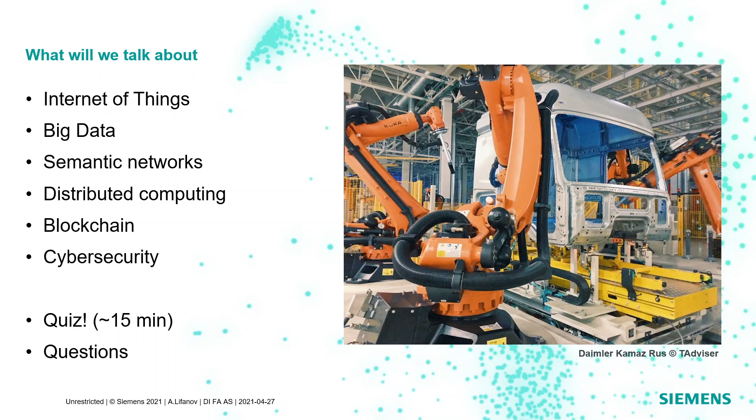Let's start. What is happening with modern industry today? We at Siemens are not directly connected to the so-called B2C, business to customer market, which we know personally, but the B2B market, business to business, it is also following the same things: sanitary shops, stores, manufacturing, etc.

You all know what you want to get if you want to purchase something. First, you want to get the thing as fast as possible. You do not want to wait for the manufacturer, even if the thing is customized in some way. For example, one person wants to buy a purple car, another wants to buy a black car, but you want to get it as fast as possible. So customization of manufacturing is one of the really modern and painful questions.

Another thing you may also notice is that innovations are coming faster and faster, and all of them need to be implemented in real manufacturing as fast as possible, because it is a real advantage for each manufacturer. If you implement a new thing in ordinary production, you can sell it, you can get more money, you can go further. So the company that is making manufacturing more modern is gaining more money.

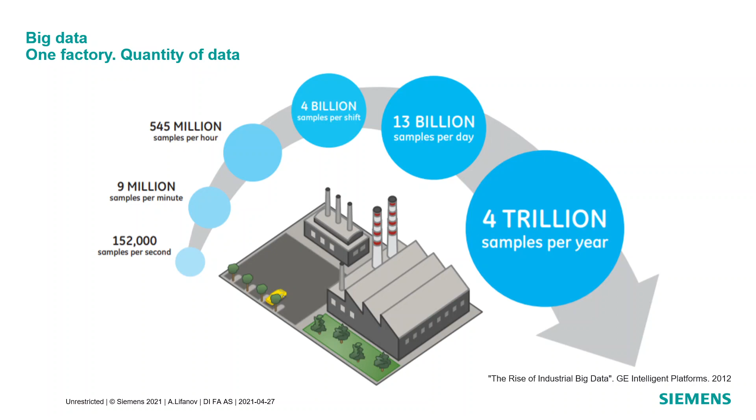It is a huge amount of data which needs to be processed, to be evaluated, to be stored somewhere, to be transported, and this whole thing produces an ocean, a full ocean of data. So during the rest of my lecture, I will use this metaphor with all other things.

The reasons are quite various. Some data cannot be transported from the measurement point to the place where it is needed. Some data needs to be pre-processed. Some data is quite complex to be extracted, and it needs some computational power. But the price of data that is not processed can be quite high.

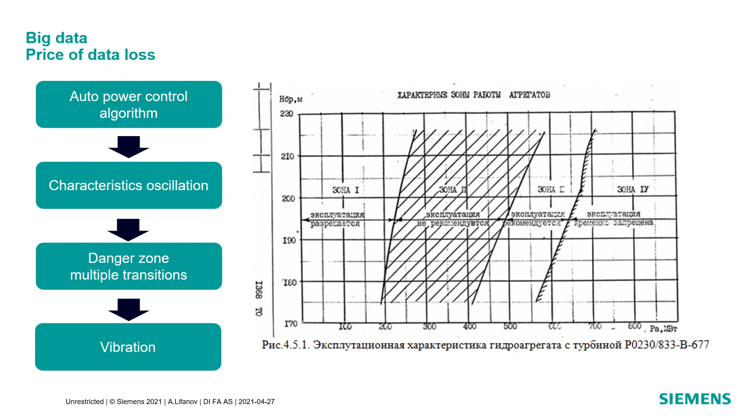But look, vibration is not an unknown thing to our times, to the mechanics, to the designers. But anyhow, this vibration was rising, and it led to destruction of the fixture which was holding the top cover of the generator.

You can imagine that a hydropower plant generator is a kind of wheel laying on its side, with a vertical axis. The lower bearing is deep inside the concrete construction, and the top bearing of this wheel, which holds the axis, is installed in the cover.

This cover is fixed by big bolts which hold all the construction together, but due to vibration it was destroyed.

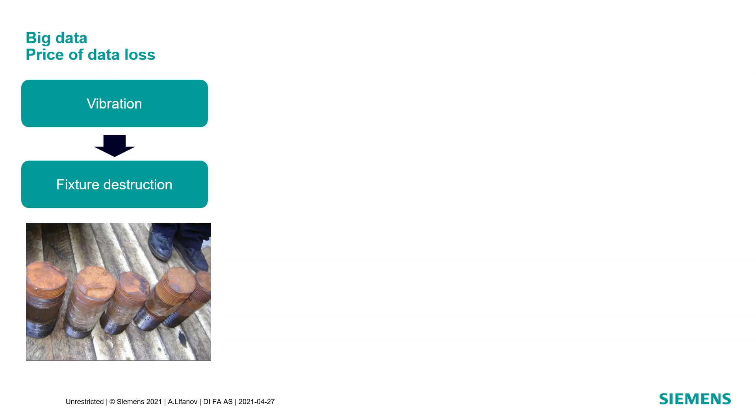The vibration is not a new thing, and it can be measured. There was some data extracted from the remains of the control system. You can see that the day of disaster was 17th of August, and even 2 months before, the average value of vibration of this generator passed over the alarm zone, and the maximum vibration passed even earlier, in May.

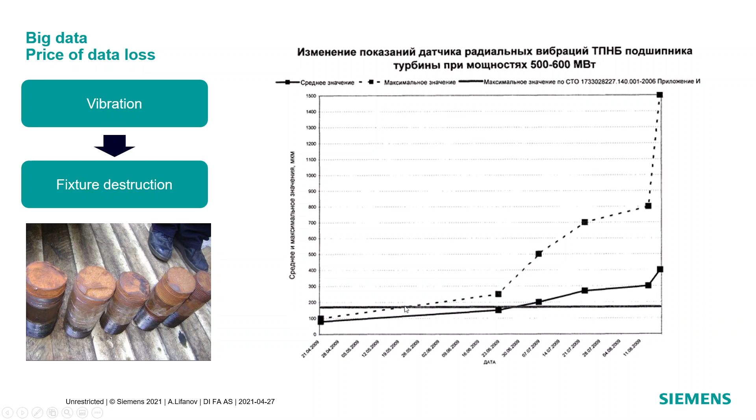What was happening? Why wasn't it stopped? Here is a citation from investigation documents. They are public, you can read it yourself.

But here is a key point: the vibration control system was not connected to the control system of the station, and it was not properly checked by the eyes, because every day it was showing normal digits. So station personnel didn't pay any attention to the numbers on the screen.

So when the vibrations started to increase, nobody stopped the generation of power for this generator. It could have been done within less than 1 hour, and this disaster could have been prevented, but that didn't happen.

So you can see that the data that was measured is not equal to information which can be used for control, for making decisions. Because data without some knowledge, some context, some meaning behind it, is useless for control, for all the processing.

How can we get information from the data? We need to process it. One more kind of question.

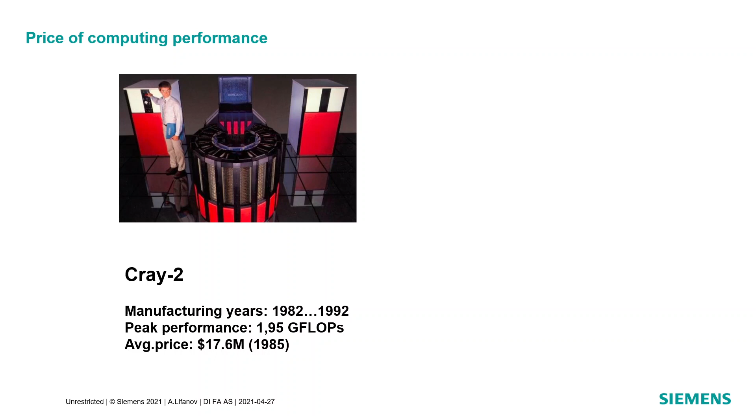Try to guess what is the thing which has the same calculation performance that we can now get in our pocket, in our bag, at our home. Any guess? Smartphone, maybe - quite close. It is an iPad, not even a modern iPad.

So you can imagine that calculation performance has risen a lot, and it is much more compact. It can fit in your small bag. And it can make the calculations at the same performance.

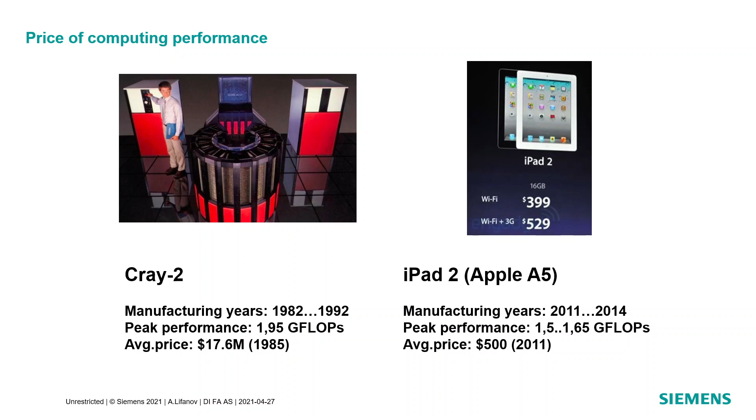So what can we do? For example, we have a milling machine, a steel mill, which has its own control system, but we need to diagnose it to decide if it's performing okay, or something is happening with it, maybe some degradation of characteristics. So we need to make some calculation.

So there is a known concept called cloud computing, when somewhere at some place in a server room there is a big PC which is processing the data. You are getting local measurements, you are sending them out, it is processed at some other place, and then it is shown whether it is okay or not okay.

But when you are dealing with some rotating equipment, the faster you are measuring, the better, because you can get more fine details from the characteristics of the equipment.

Because calculation power became more compact, there was offered one more concept called edge computing. It is called edge because the calculation is moved from the center of the network, from the core, to the edge of the network, and things have changed a little bit.

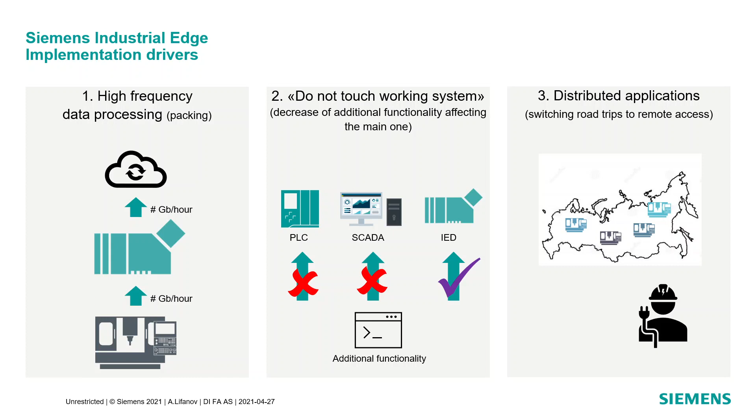For example, processing vibration or measuring energy consumption or something like that. But you can imagine that while the functionality is the same, the equipment on the lower level is quite different. What to do?

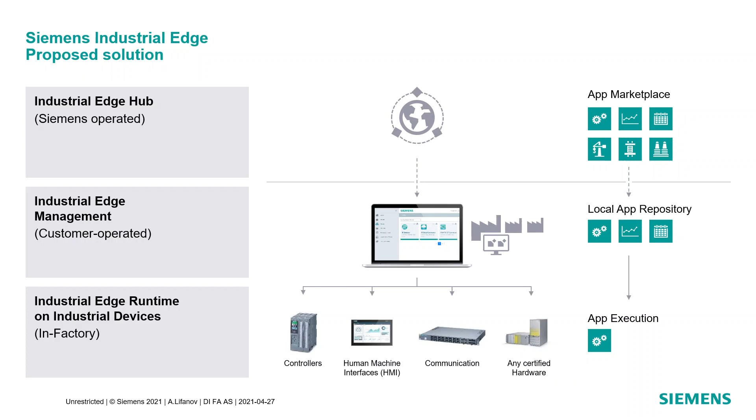Siemens uses so-called Docker infrastructure for all these things. Maybe some of you have dealt with so-called virtual machines. What does it allow?

It allows you, on the same hardware, to run quite varied software. It isolates the functionality from one to another because you can run several virtual machines in parallel, but it is not handy because you need several operating systems at the same time.

There is a modern concept called containerized applications, or Docker applications, which use the same operating core, the same hardware, but are isolated from each other, and each container has its own file system. Of course, they can exchange data by network means, but they are isolated.

But at the same time, Docker applications are quite lean in hardware use because they do not need to run a whole operating system for each one.

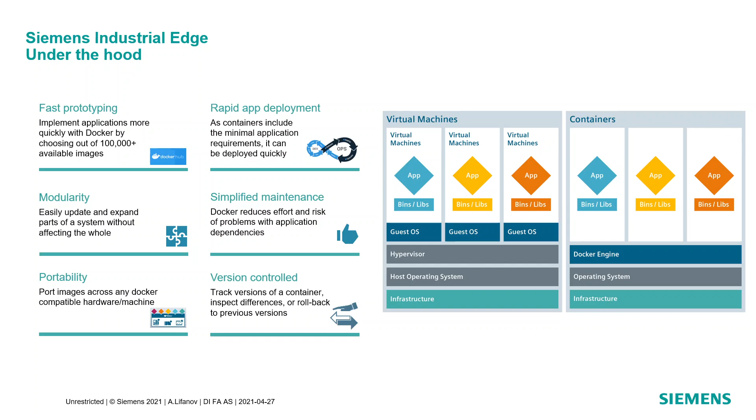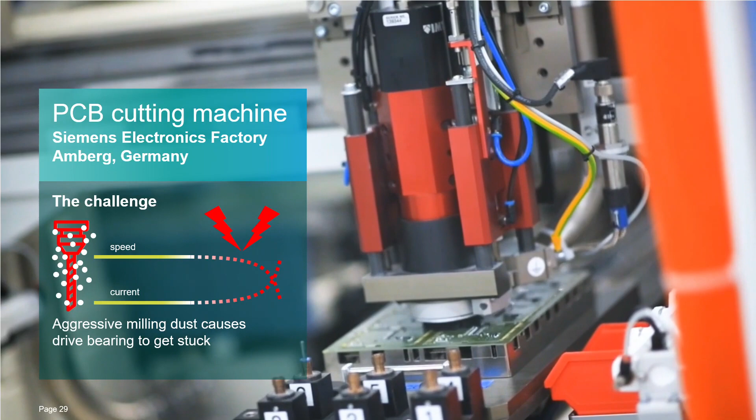For example, I will show you what Siemens does with this infrastructure. There is a famous factory where our Siemens PLCs are produced, in the city of Amberg in Germany. This machine on the screen is cutting printed circuit boards from a bigger board through a milling process, which of course makes a lot of dust. This dust gets into bearings and motors, and at some point it causes a jam. So the PCB cutting machine stops, and before you repair it, it produces nothing. Obviously, one of the things needed is to predict the stopping.

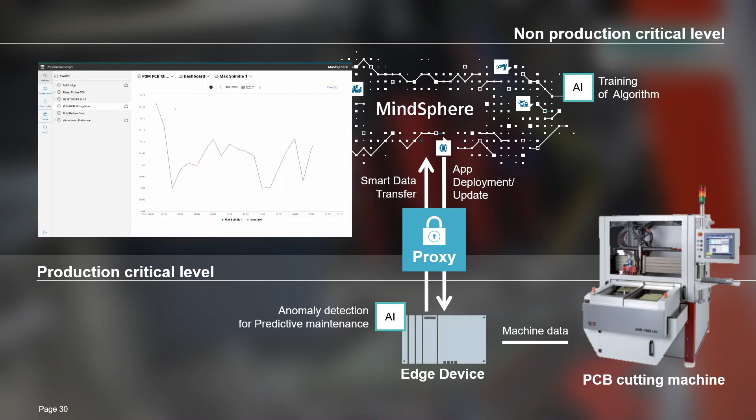The idea was to measure the current of the motor, because the jamming of the spindle is not a one-moment process, it rises over time. As we saw in the previous example of a hydropower plant, it can be diagnosed by machine. It's quite hard to do by eyes or by hand, but it can be predicted by machine when the milling machine will stop. This allows analyzing vibration and consumption data on site, right on the machine, but also streaming the measured data to other machines, so they teach each other what to expect to predict the stopping. It allowed the manufacturing factory to predict, two days in advance, the stopping of this kind of machine.

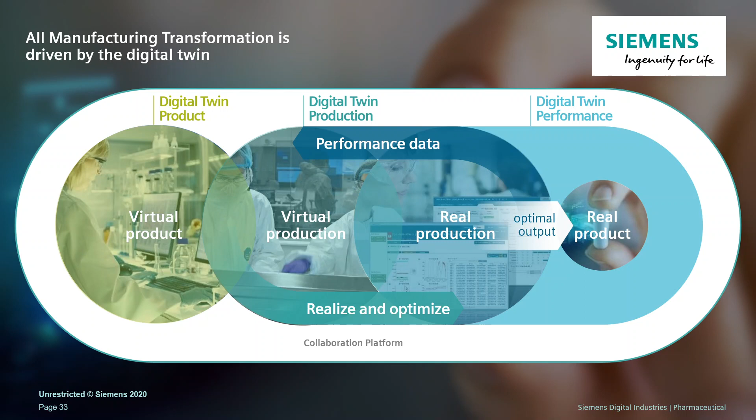Let's go further. One more concept that needs explaining is the digital twin. That means everybody needs to learn how to work in advance before you really dive into deep water. The same is true with manufacturing. Of course, we can start making things from the very beginning, produce something, get errors, go back, etc. But the modern concept allows you to make a so-called digital twin—a digital image, a digital model, which can be tested inside the computer before you really manufacture each item. And when you design your machine, you can even make a digital twin of the manufacturing line, and get the weak points of your manufacturing even before you put the first brick when building a plant. We will show you one example which I got from my colleagues in Norway.

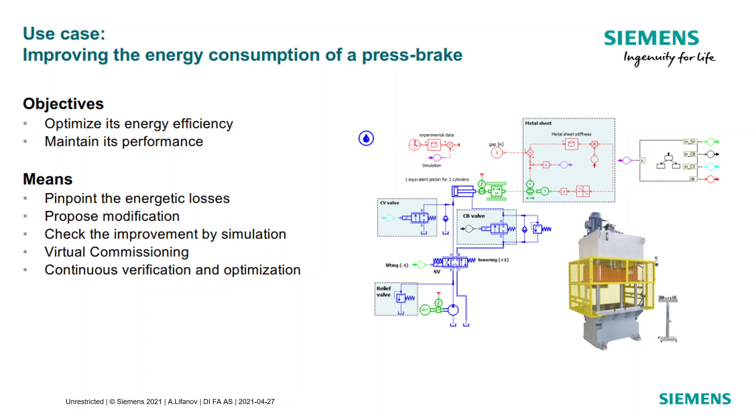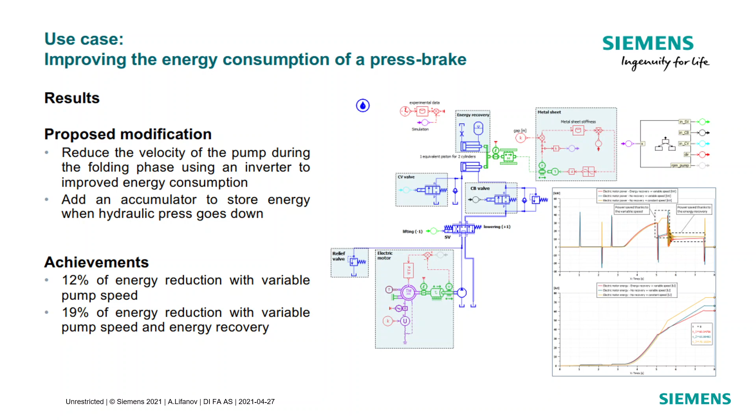This is an example of a press machine, a hydraulic press, which makes metal details. They wanted to optimize it to lower consumption. The designers of the machine did not start working on the metal from the very beginning, but instead made the hydraulic scheme and ran it in simulation software. That allowed them to find the weak points of the machine from the very beginning, and they made some optimizations during the design, while also getting some kind of ideal state of the machine.

That is the next step. When they implemented the real machine, it allowed them to apply the ideal characteristics in the form of an advisor to the machine maintenance personnel, because they could compare, part by part, the real performance, for example of a hydraulic pump, with the ideal. So it is a real help in diagnosis, because there's no need for some old guy who knows this machine from the very beginning and can diagnose it just by hearing or looking. Now it can be done in an analytic way.

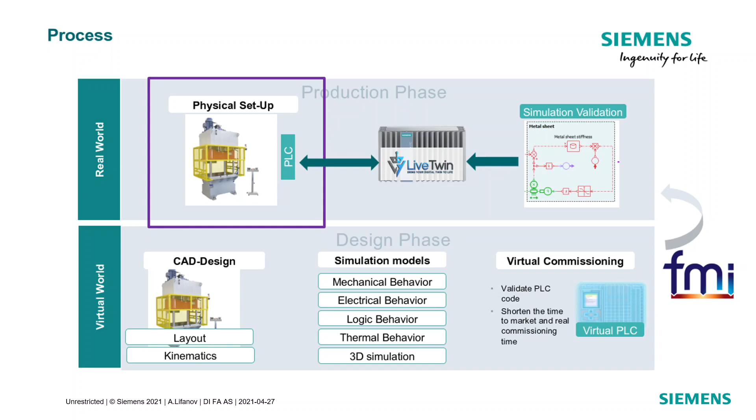Let's go further. Of course, all of you, I suppose, have smartphones with voice assistants, smart assistants inside them, so you can ask them to do something—for example, get the weather forecast, turn on the radio, set a reminder or an alarm clock, etc. But the same thing can of course be applied in manufacturing, and it's quite modern, but not a dream, because I have seen the first machines using these techniques. For example, a maintenance person can have his own phone, connect to a machine, and ask it to help him—for example, to diagnose it as we've seen before, to move to some maintenance position, or to ask the machine for documentation on how to do a process.

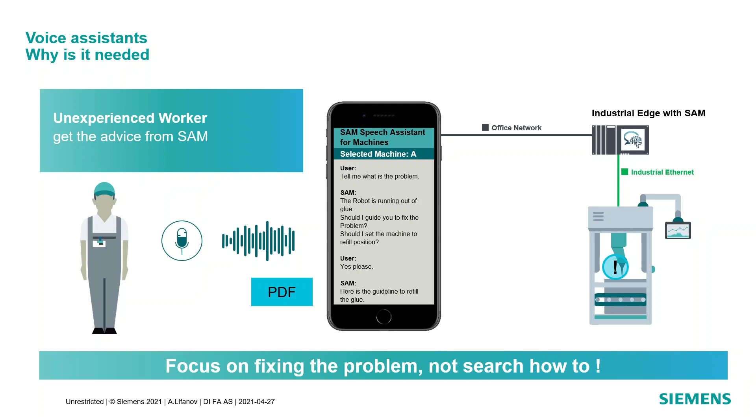It's quite simple from the point of usage, but quite complex inside. I'd like to tell you about the things living inside such a system. Of course, speech-to-text translation is not new—it's maybe a 20-year-old technology. And chatbots are also not a big thing; you can find programmable chatbots online that you can make yourself, for example Alisa, etc. But behind the chatbot there should be some knowledge of what is happening inside the machine. This is the real core of the system, not the text-to-voice or voice-to-text or question-and-answer part. How do you represent the knowledge behind the data?

It is usually shown in a so-called knowledge graph. The system creates, inside the concern, a so-called industrial knowledge graph, which describes modern tools, modern generators, modern equipment, and allows this knowledge to be used for maintenance, for example.

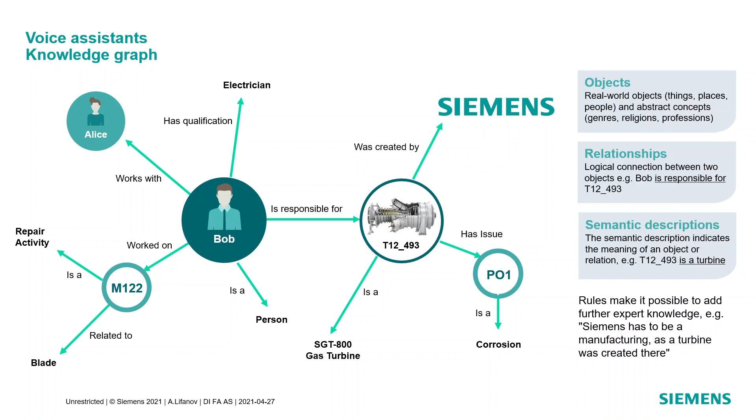Next thing I want to explain is blockchain. Of course, you have heard of it 1,000 times, probably because of cryptocurrency, but that is not the only application of this technology. What is blockchain by itself? It is some kind of system which allows implementing trust between exchanging parties, but without a central point of exchange data.

Having a central point is not always good, because it is a weak point. If something happens with this central database or central registry, all the data is gone. Also, there is a problem with trust. For example, you cannot make sure that nobody else is altering your own data. You write that you are putting your money into the bank, but somebody writes off that money and you do not see it. So this is a problem of trust.

The distributed technology, so-called distributed ledger, allows every party of the system to see what is happening inside. Blockchain technology is called this because of its internal design. Each change of the state of the system is written in blocks, and every block has a header.

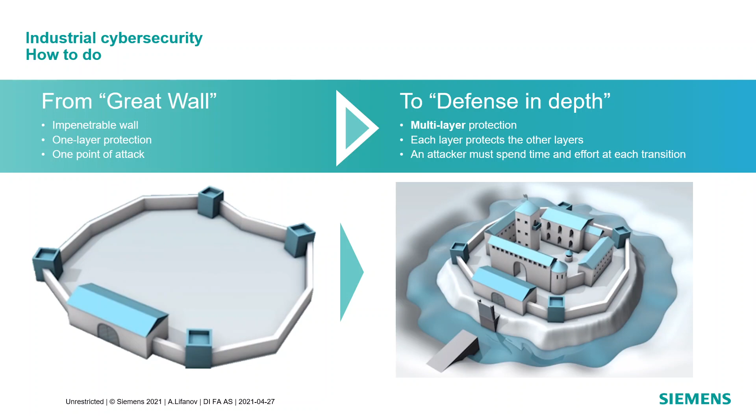But besides that, it is not only a kind of hardware or software protection. The implementation of cybersecurity for modern control systems also includes organizational measures, such as which persons are allowed to work on or connect to the system, and what should be done when an attack is detected, and so on. So for now, modern cybersecurity is not only about hardware, connections, or parameterization, but also about the organization.

Okay, that was the last slide of my lecture.